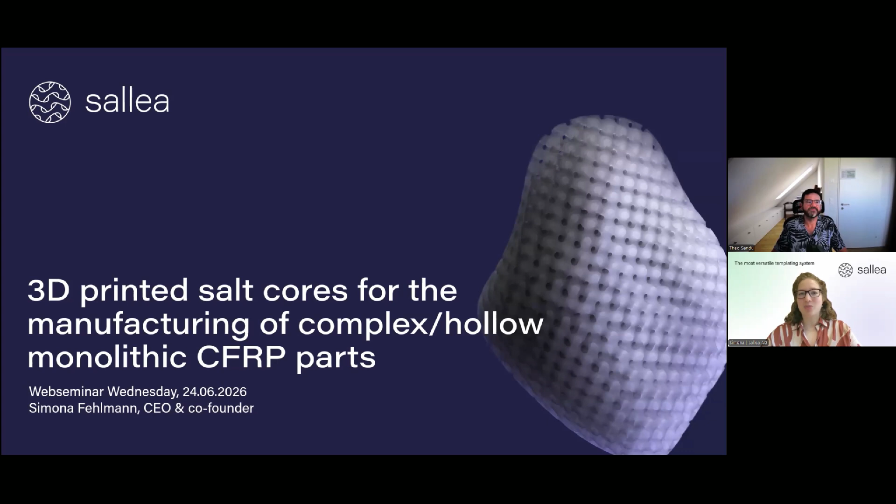I will first start with a short look at the agenda. First, I will introduce myself and Sallea - what are we doing, where are we coming from. It's already written in the title, so we work with 3D printing. I'll give you an introduction on indirect additive manufacturing, the value add of using sacrificial cores for composites manufacturing. Of course, there are other solutions available, I will also talk a bit about them. Then I want to show you some characterizations of our salt cores in-house, and towards the end I will show you some case studies before there will be the outlook.

Now, our journey at Sallea started at ETH. I myself am a material scientist, I did my bachelor's and master's here at ETH. And then during my master's thesis, I met one of my co-founders at the time who did her PhD, and together we actually developed the technology to 3D print salt.

During that time, we thought, hey, it would be actually nice to see this on the market and to see where is actually the benefit of such a solution that we developed in research. We applied for a so-called ETH Pioneer Fellowship, which is basically to transition from research to startup. We received this in 2022, and that led to the next step, incorporating our company Sallea in 2023.

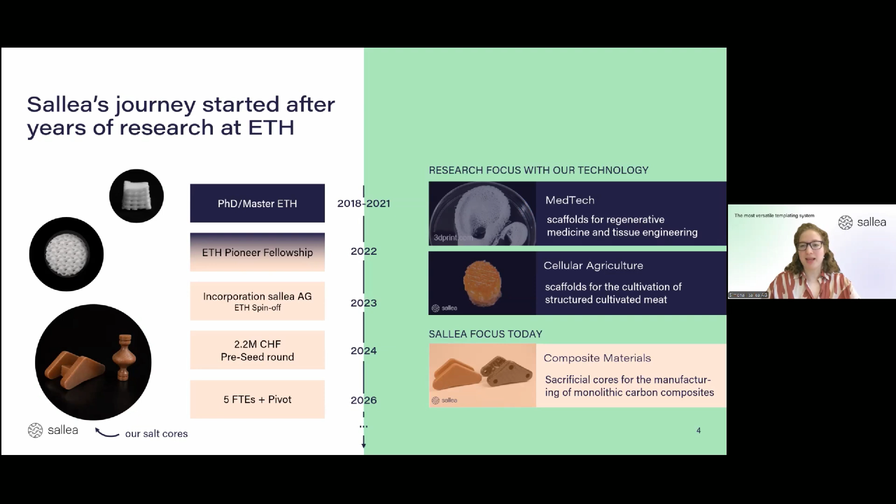To show you a picture of our team - we are 5, a small team, but we combine the best from technology and business. Right now we are 2 co-founders, Anna and myself. I'm the technical one, and Anna studied at the University of St. Gallen, so she has all of the business and finance background and is driving that side of the business. We have 3 employees that are mainly technical, mostly working on further developing our products and our technology. We are based in Zurich, at the moment still at ETH, but we are about to move out, though we stay in the broader region of Zurich.

Now, I already mentioned a couple of times the 3D printing, and this is also where our roots come from. When we initially started transitioning from research to the startup, we were also looking: hey, why is 3D printing not really being adopted in the industry for industrial manufacturing? We actually found this study from Jabil, which was conducting a study with a lot of industry players and was asking, what are the main limitations why you don't adopt 3D printing?

If you focus on the first answer, you can see that one of the biggest issues are actually material issues, either cost or availability. And what I want to point out here is that even over the years, this became more prevalent. They also asked what challenge does your organization face with 3D printing for those already using it - the first one is the cost of the pre and post processing, but already there, the second one is the limited selection of materials.

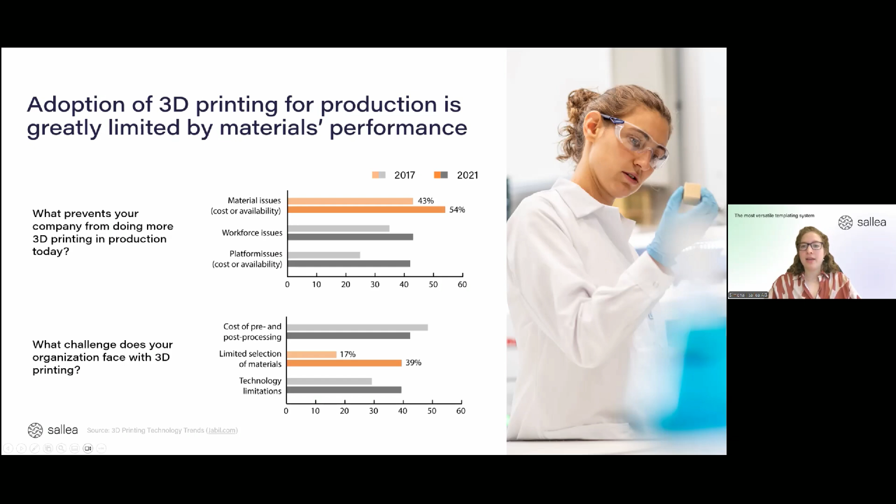And this is exactly why several companies and also research organizations started circumventing direct 3D printing, but looking at indirect additive manufacturing to circumvent these material limitations.

In the early days, actually the three-step indirect AM method was used, and I think it is still being used and also known in the composite industry, for example for making metal cores that can be molten out, where usually you first 3D print a plastic material, here shown in purple. Then usually you cast a silicone mold around it. You take out that first material you printed before you can actually cast, for example, the metal you want to have, and remove the silicone core to get your mold. So it's a very lengthy and tedious process.

Some examples for that are, for example from academia, when wax cores are used for metal casting, or in the industry, this is also used a lot in the jewelry industry. And making the link to the composite industry, this is also still used quite a lot for the metal cores.

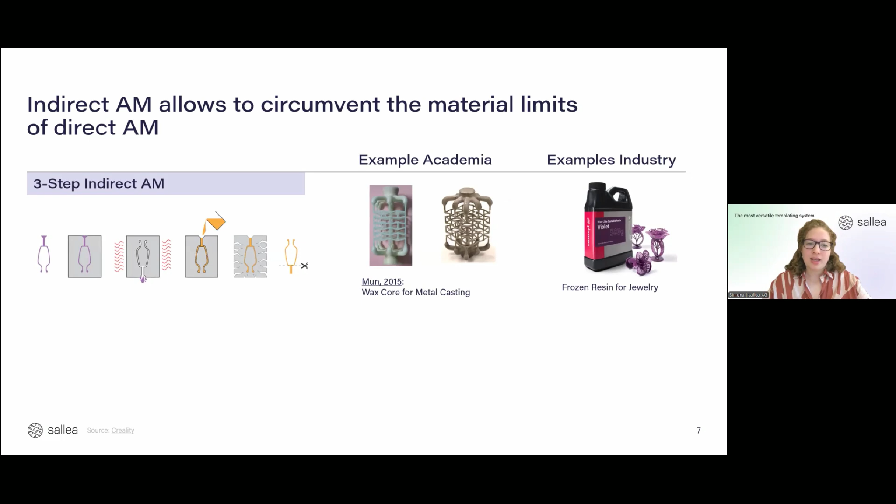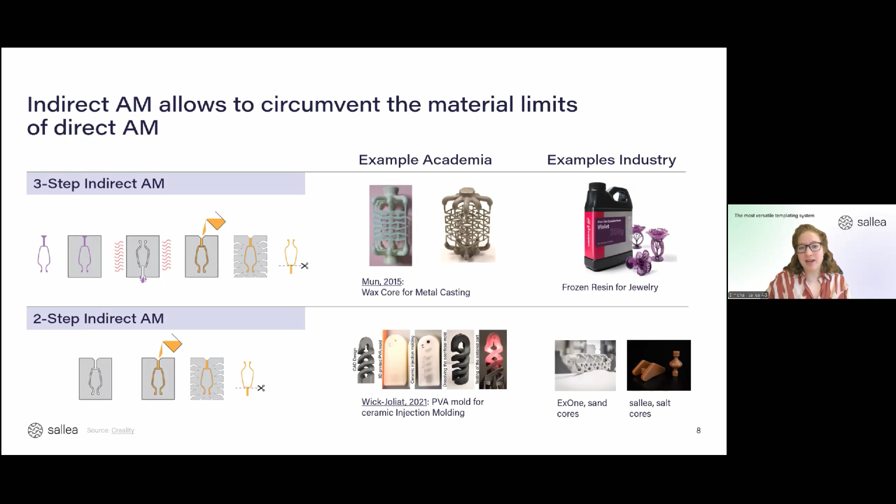Now, of course, over time this has also evolved, and basically two-step indirect additive manufacturing has been established. Instead of having that extra step of first printing something to even make the mold, you directly print the mold. But that means it needs to be also water soluble. And this is exactly what we also do at Sallea. So I want to focus a bit and explain in more detail how we leverage that.

We also use this two-step indirect AM method to structure materials. And we do that only for materials that are either not directly printable, or that can be printed but not at the resolution needed, or not with the mechanical properties needed for the end use.

And we do this by using binder jetting as a 3D printing technology. For those not so familiar with additive manufacturing, it's a process where you have a powder bed, and in our case this is salt. Then basically you drop the binder onto the powder and build your part layer by layer. And we do this to print our salt cores.

Then when we move to the processing step in the center here, so we have this salt core. And I took an example, of course, from the composite industry, as this is our focus. Then this salt core can be used to drape around, for example, carbon textile or prepregs. It can be cured. And then in the end, the salt core, of course, is water soluble, can be leached out and results in a hollow part.

And last but not least, on number 3, you see actually the actual part that we have made. And I will show in more detail later in the presentation how we did that.

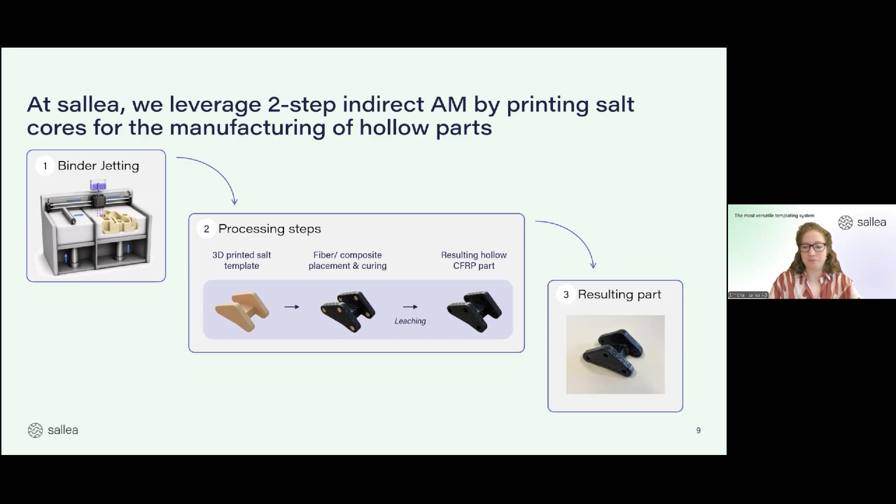Now, of course, this technology can be used for composite materials, mainly for making monolithic thermoset carbon parts. Yet our technology can also be used to shape other materials for other industries. One of them is to use it as sacrificial cores for injection molding, so for polymers, or also thermoplastic composites, or also for making, for example, cell culture scaffolds, because there the issue is mostly that materials are also not directly printable.

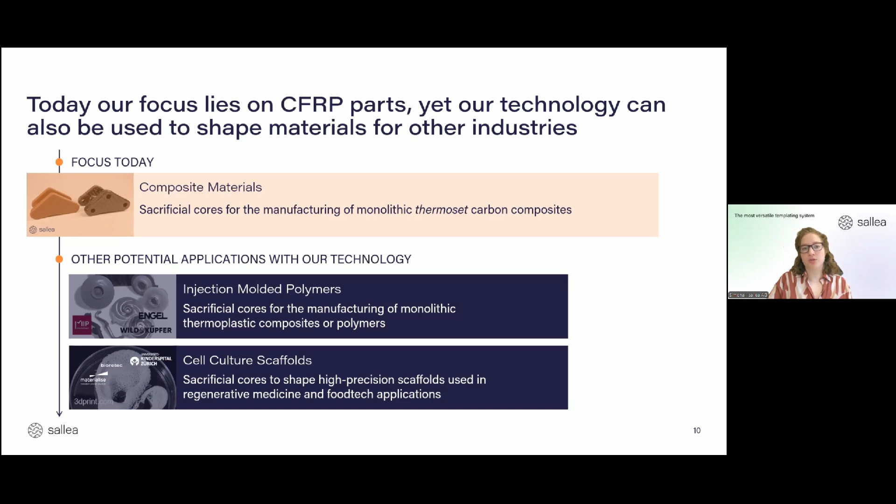And I want to show you an actual example for the second potential application. It is, for example, also still within the composite part, making a sandwich panel, to actually make superior cores for such a sandwich panel that is often used in the aerospace or space industry. And how this is done is basically the same way.

So we still 3D print a template. In this case, that can be a lattice—it doesn't have to be. Then it can be injection molded with quite high pressures and temperatures. Then it's solidified, and then again the salt core is washed out, resulting in such a lattice core.

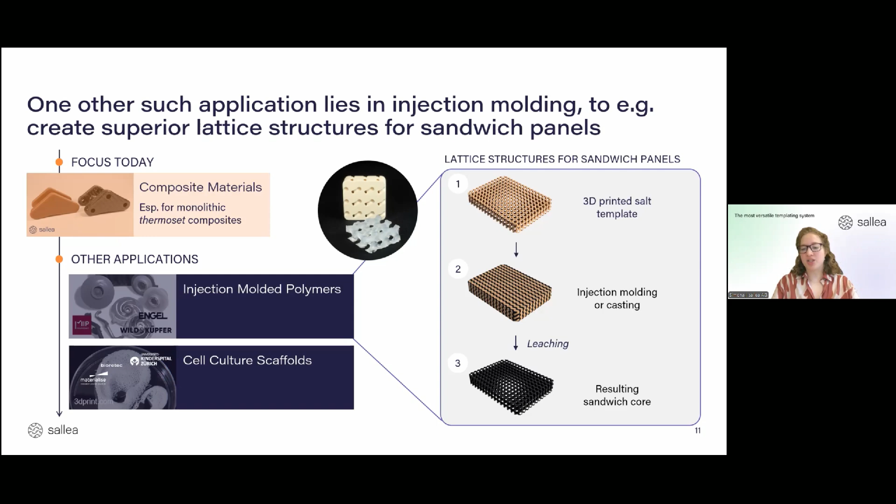Now, however, since our company is focusing on thermoset composite materials, I will also stick with that application for the rest of this presentation.

Since you're all experts in this industry, you're aware that the manufacturing of complex carbon composites still requires quite a lot of extensive manual labor. Typically, such parts are assembled, so they're manufactured in single parts that are then either assembled together or glued together. However, in manufacturing, this leads to quite long lead times. The manufacturing costs are quite high, especially because there's usually more labor involved and complex tooling. And there's also reduced mechanical strength because of discontinuous fibers and potential extra weight, for example of screws to assemble the part together.

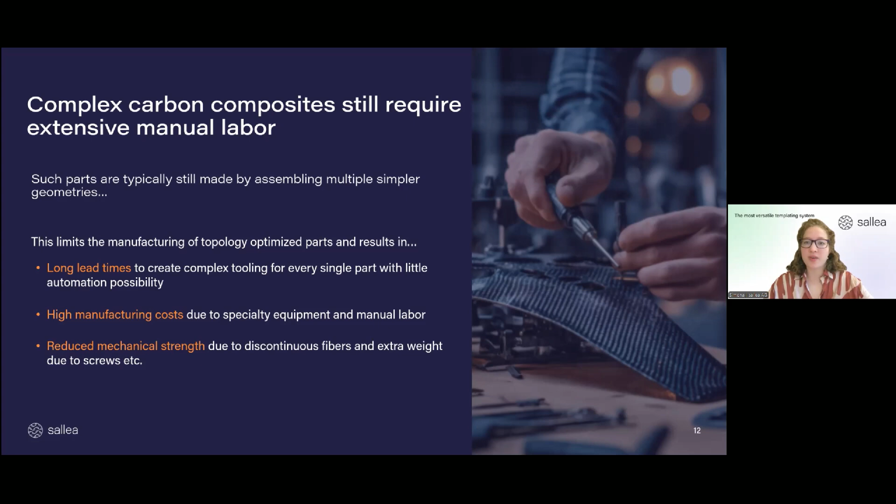One of the solutions to circumvent that is sacrificial cores. Why are we using sacrificial cores? We see a huge benefit because single piece hollow structures can be manufactured in basically one or two steps. This is a great benefit, allowing us to cut costs by more than 20%. It also allows you to design the part with the best strength to weight ratio, so you basically only have material where you actually need it.

How we do it, I already explained - we use 3D printing, and the biggest benefit this brings is that it allows for topology optimized structures. You have complete design freedom to make your part, and it also allows for fast design iterations at no additional cost, because there's no tooling that has to be waited for, paid for, or adjusted to change your design. And because we're working with salt, it withstands quite high temperatures and pressures, but is still readily dissolvable in water.

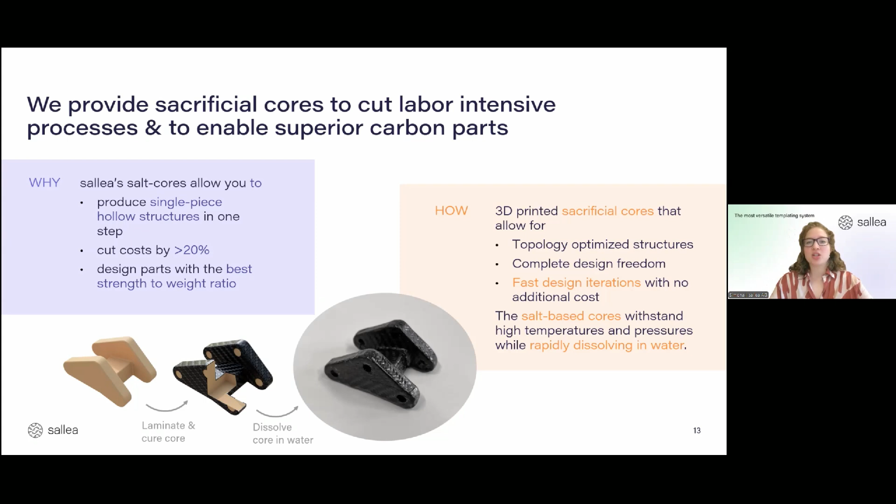I mentioned earlier that of course there are other sacrificial mandrels on the market, and there are way more than I'm showing on this slide, but I tried to group them together. What's quite standard used is, on one hand, polymer cores that are often, but not always, 3D printed, and usually dissolve in water or an aqueous solution, and also wax and metal cores. Going through this list, the ease of use of these cores is often not so easy. For example, for wax and metal, it's a very tedious process to even get to your core, and that's just very time consuming and a bit of a nasty process.

Regarding shape complexity, the polymers that are 3D printed have a similar advantage as we do. However, the ones that are molded are still quite limited in shape. Last but not least, what's super important is the solubility or removal of the core. For wax and metal, it has to be molten out, and often there's also something remaining inside - it's a bit of a nasty process. This, of course, is more beautiful for the polymer ones that are water soluble, but they take quite some long time. And salt, as you can imagine when you cook pasta, dissolves quite fast. Looking at the price, salt also has quite an advantage compared to the other solutions.

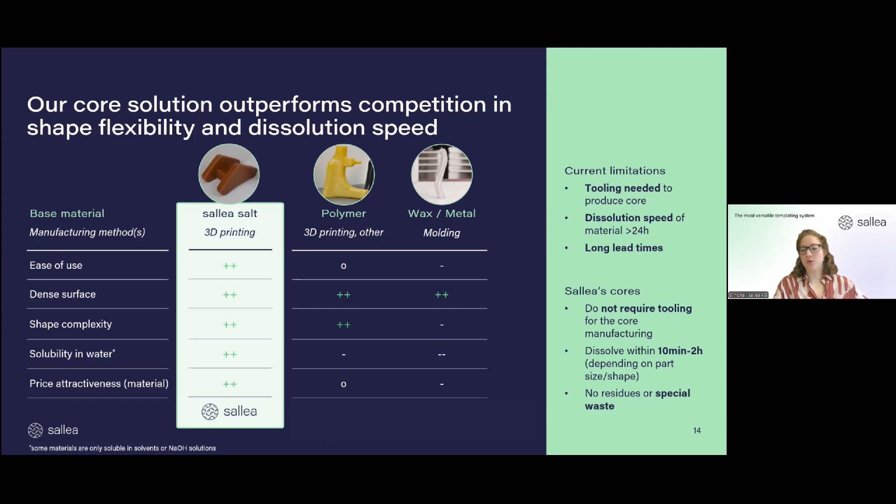Of course, it doesn't come from nowhere that we knew in which direction we should develop our core. We conducted a lot of customer calls and interviews to figure out what's actually the pain point and what's needed. This basically set the baseline for the requirements of the development of our salt core platform. On the next two slides, I want to show you a few characterization data that we've conducted on our core before using it to manufacture actual carbon composite parts.

The one I want to start with is actually the mechanical stability. Processes to make carbon parts usually require that the salt cores are stable up to several bars, if you're talking about standard RTM or autoclaving processes for thermoset materials. So we did conduct some compression tests on our end with our samples. For that, we used cylindrical samples with the same diameter and height. Here on the slide you see an example of 3 samples that we tested recently. You can see that the material is a brittle material, with a compressive stress of around 2 megapascals. We also took out the compressive modulus from these graphs, and it's roughly 264 megapascals. Of course, the standard deviation is a bit larger - as you can see, there's one sample that's a bit out of line compared to the others.

Additional measurements, and actually testing the core in action, showed that our cores can withstand pressures beyond 50 bars. It's not directly represented in this graph, but I wanted to add it here because I find it quite amazing how much pressure salt cores can withstand.

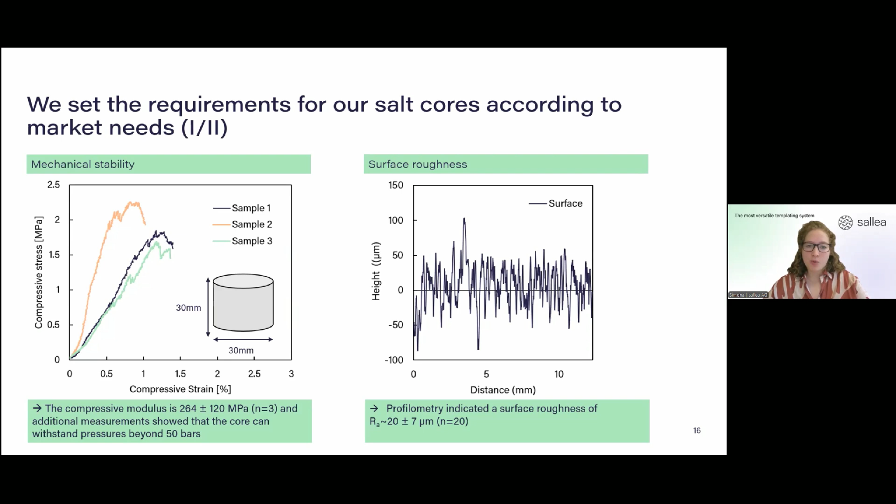Now, what you see on the graph is just one example of a sample that we tested. For those not familiar with the measuring method, basically you have a needle on the surface, you draw it over the surface, and it measures the displacement over the distance from A to B.

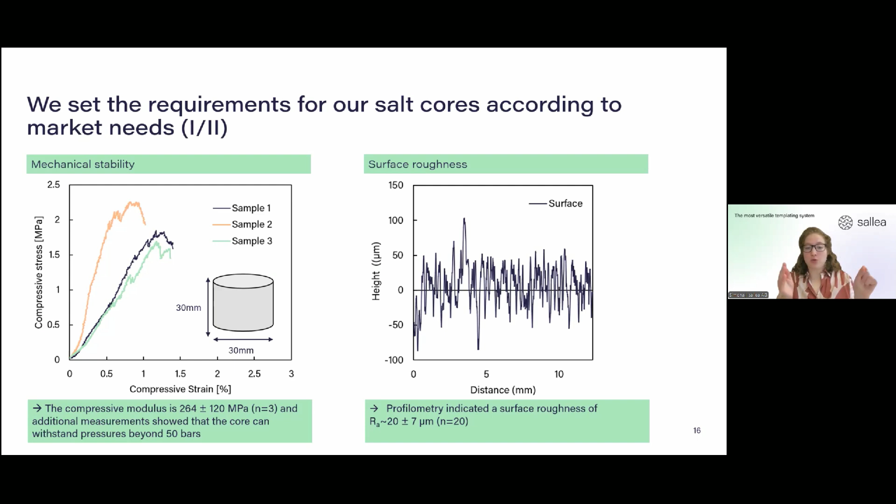Now, what is also very important to look at, especially for our customers, is the geometrical accuracy and tolerances. For that, at the moment, we are working with optical 3D scanning, and we compared these printed salt cores with the CAD file.

Of course, the standard deviation here is a bit bigger, but on average it is below 0.3 millimeters. What is still to be done is further comparing different salt core samples with each other to know how reproducible our process really is. But from what we have seen so far, it is actually quite reproducible from the 3D printing aspect.

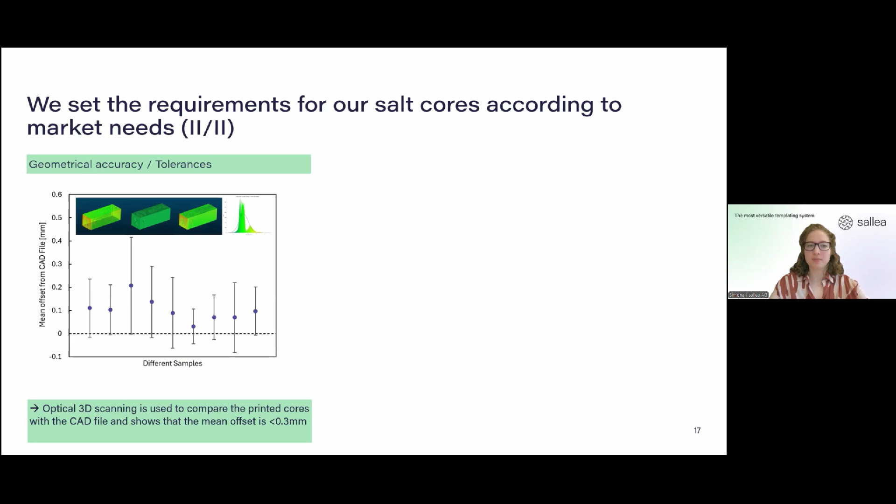In general, to speed up the process of dissolving the salt core, adding flow always helps. The water can also be heated, for example to 60 degrees, which speeds up the process as well. And if available, ultrasonication can even improve that further.

Now, I showed you how we manufactured our salt cores, and some of the characterization we've done on them. The next step is how our salt cores are used to actually manufacture the carbon part. Of course we do that with customers, but first I want to show you an example we did in-house: we wanted to make a monolithic bracket with our salt core.

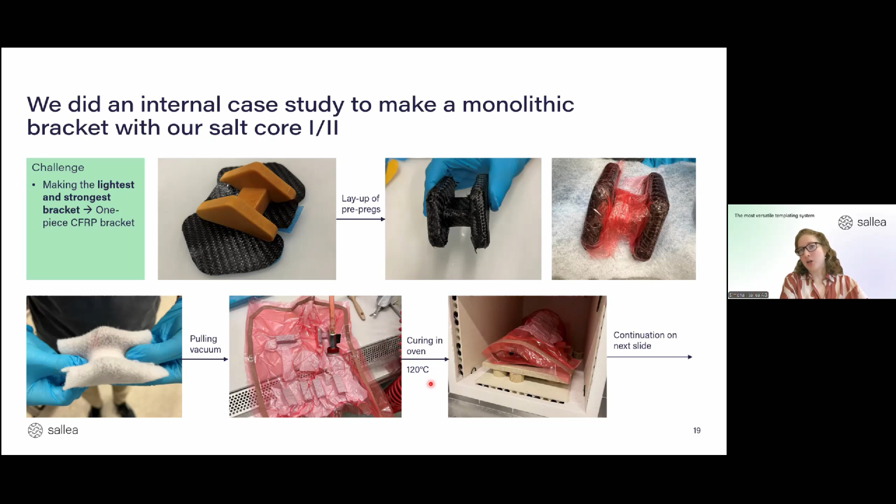Then we were removing the part from the vacuum bag. As you can see here, this part didn't have any hole, and we created that on purpose because we also wanted to see how machinable the carbon part is after it is cured, once for the carbon, but also for the core that is still inside.

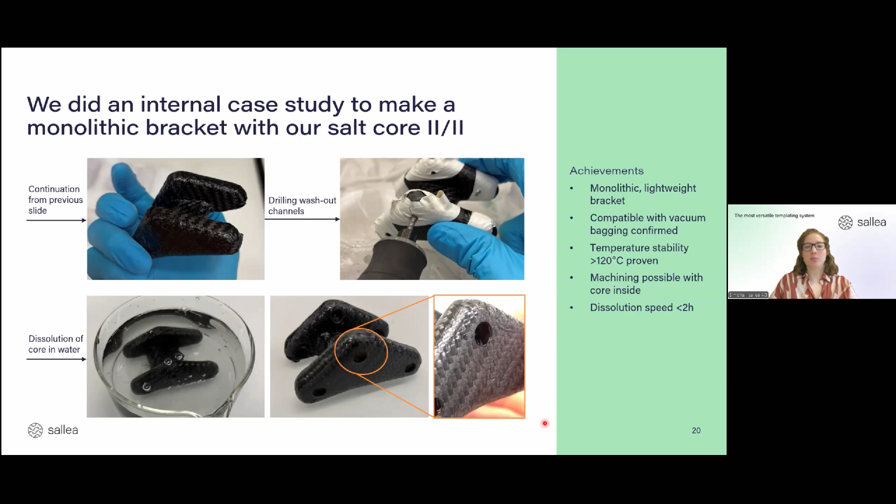What this proved to us is that we can achieve monolithic lightweight bracket parts with our salt cores. We also learned that our salt cores are compatible with vacuum bagging, and that it's temperature stable beyond 120 degrees, and that machining is still possible when the core is still inside. I think one of the most important things is that it still dissolves quite quickly, in this case still below 2 hours.

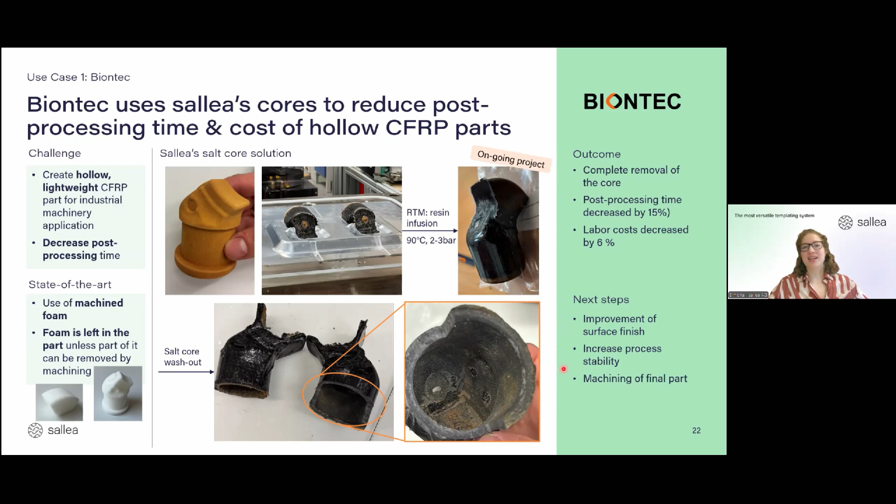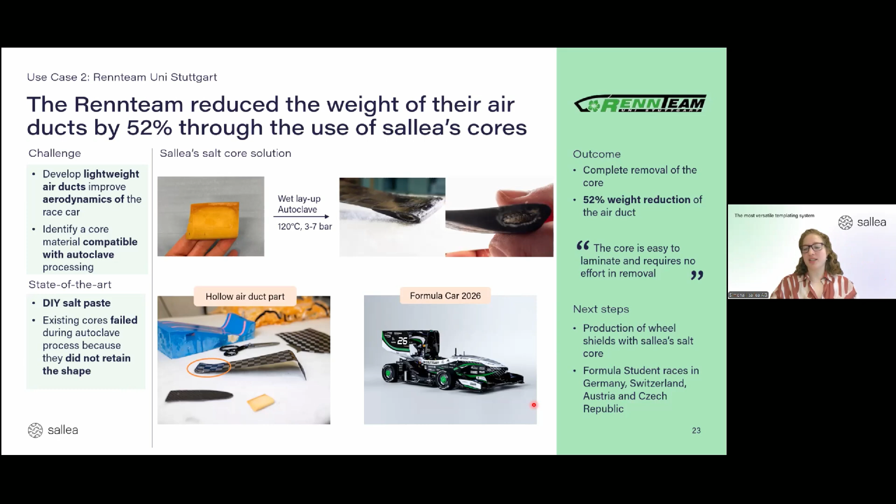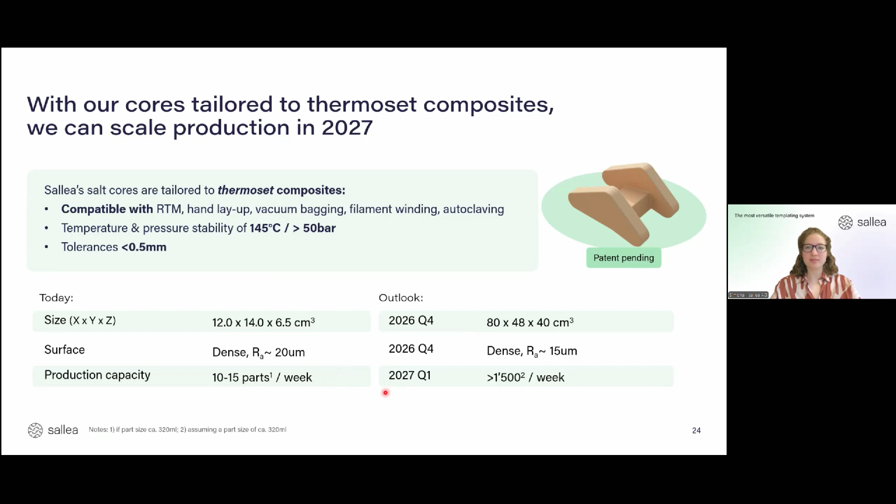To end the presentation, there is also a call to action for you. It was very nice that you all attended this. If this inspired you and you have any parts that you currently cannot produce as a monolith, please reach out. Also, if you have parts that you would like to manufacture but cannot do it, please reach out. We are really looking for these parts that are tricky to manufacture, because we believe we have a benefit for you, not just on the manufacturing side, but also on the cost side. And last but not least, we are also open for production projects for smaller volumes early next year, because we will have this production capacity with the new printer we are purchasing.